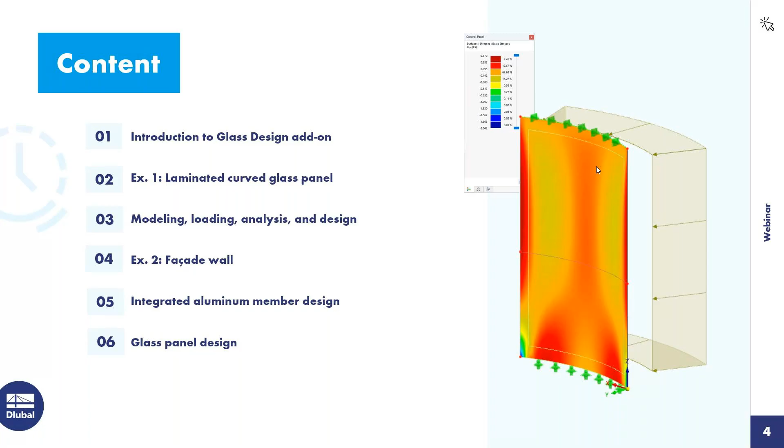So regarding the content over the next hour today, I do want to begin with a brief introduction to the glass design add-on available within our program RFEM 6. We'll then move on to our first example that you can see over here on the right-hand side, which is a simple laminated curved glass panel. We'll talk about the modeling and the loading. We'll run a quick analysis and we'll carry out the design according to the ASTM standard.

For our second example, we'll move on to a facade wall. For this one, we do want to integrate the aluminum member design along with the glass panel design, also according to the ADM standards and ASTM.

So let's turn now to a quick introduction to the glass design add-on. This particular add-on is seamlessly integrated within our FEA program RFEM 6. So RFEM provides the analysis of our structure, including the modeling and the loading, but when we want to carry out the design of these glass surfaces, we do need this particular add-on.

This add-on also allows us to define monolithic or laminated thickness types, just as a fact that we are working on the insulated glass design as well. We'll cover this more towards the end of our presentation today. Now, within the RFEM 6 program, we do have access to our material library for glass materials and foils, but you can also create your own user-defined materials as well.

We have the ability to specify the shear coupling behavior between the laminated glass layers as fully uncoupled or release, or fully coupled or rigid. We do utilize what we call the laminate theory to calculate the panel stiffness. So we consider all of the various layers within a laminated glass panel. We apply the laminate theory to come up with the stiffness matrix for the overall surface. So we'll see this in our example today.

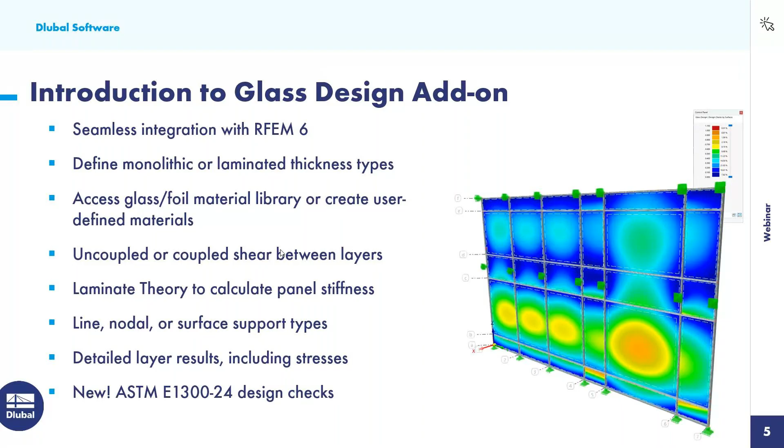So we'll turn now to specifically the ASTM E1300 and how this is integrated within the program. So the first thing to note is that we can generate the load combinations automatically according to the ASCE 7, but it is required that when we enable this glass design add-on that we choose the ASCE 7 glass load combination generator. And the reason why this varies from the standard ASCE 7 is that for our various load cases, we now have enabled the load duration factor. So this is needed to carry out the strength design of our glass panels.

Now, the IBC is also a little bit more clear about serviceability limits for glass or members that are supporting glass panels. So we are going to generate the load combinations for this type according to the IBC and section 1604.3 for our serviceability or deflection checks. And again, this will make more sense as we move through our examples today.

So from the ASTM, we are going to calculate the max allowable tensile stress for each surface. And for this, we refer to table X6.1 and X6.2. Now, this is dependent on the glass type, the load duration that we talked about up here within the load combinations, and the probability of breakage.

Now, I would recommend that you reference the ASTM in this particular section because there are some assumptions here that are made, such as a uniformly loaded glass plate, or there are some limitations with thickness and size in order to calculate these max allowable stresses. So if you don't fit into these particular criteria or recommendations, then you would want to use your engineering judgment if perhaps a general stress design, which is code independent, would be better within the program.

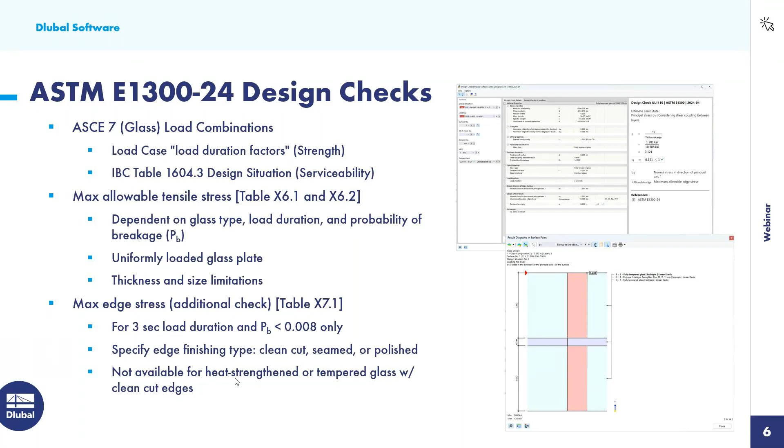Okay, so we will turn now to RFEM for our first example. So when we do launch the main program RFEM 6, we will go ahead and give it a model name within the base data dialog box. The second tab that is shown here are all of the various add-ons that we have available. So more or less, you can create your own software package that's specific for your design needs. For this first example, we will take advantage of the glass design add-on.

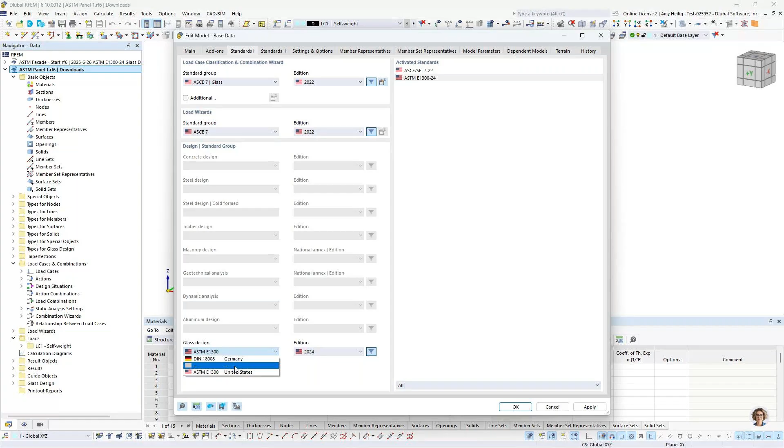So under the third tab, this is where we can set our standards. The first one is the drop down to generate the load combinations automatically. And as mentioned in the PowerPoint, we do need to select the ASCE7 glass option here. The glass design dropdown, we now have the ASTM E1300, the latest 2024 standard. You'll also notice that you can choose a code independent stress design as well if you prefer. So once this information is input, we can click OK.

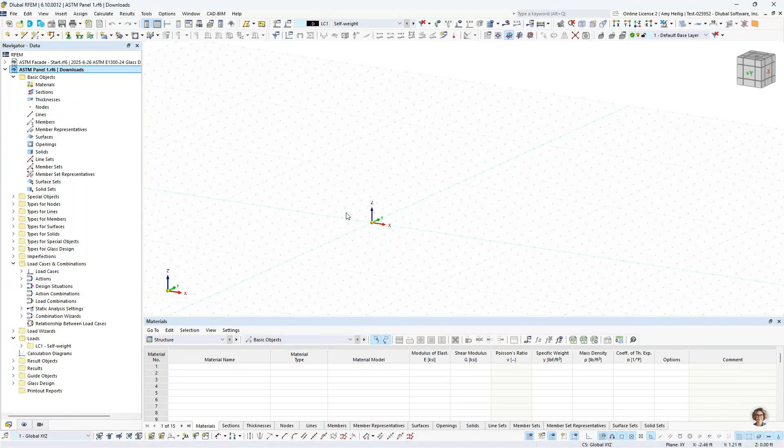When we're brought here into the main program, we have our graphical interface to work with here at the center window. We have our quick tools up at the top. Our navigator on the left will include our input data as well as our results, or we can work with the table options down here at the bottom. So we'll begin first by drawing a simple line element. And a line element can be found up here in our tools.

So rather than a straight single line, I am going to choose an arc where I can define here the start and end nodes as well as the radius. So I'll snap here to the origin point. My second point is going to be 5 feet away in the Y direction. And then I want to either graphically select here what the radius is, or in this case, I'm going to reverse the orientation and directly type in the radius into my dialog box. I hit enter and that line element is complete.

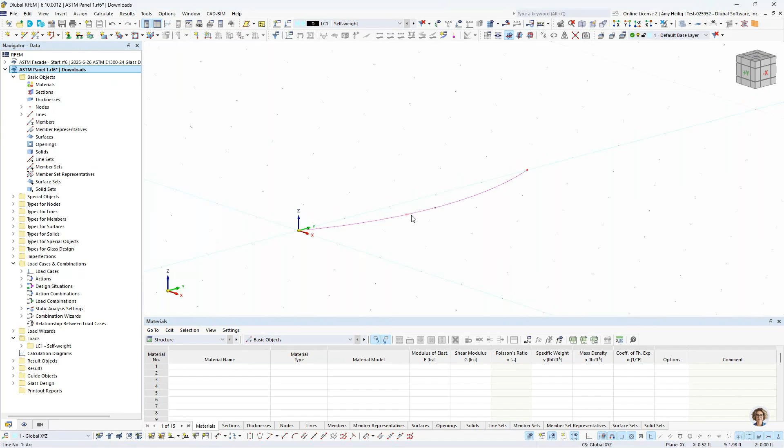So I right click on my mouse and I'm going to select this line element. We have the ability here to right click to extrude this line into a 2D surface. And I'm going to create my surface panel here that will be 8 feet in the vertical Z direction. I hit apply, I'll right click to exit out, and we have our surface shown here. Now it's currently displayed as red because we do not have a thickness or a material assigned to it.

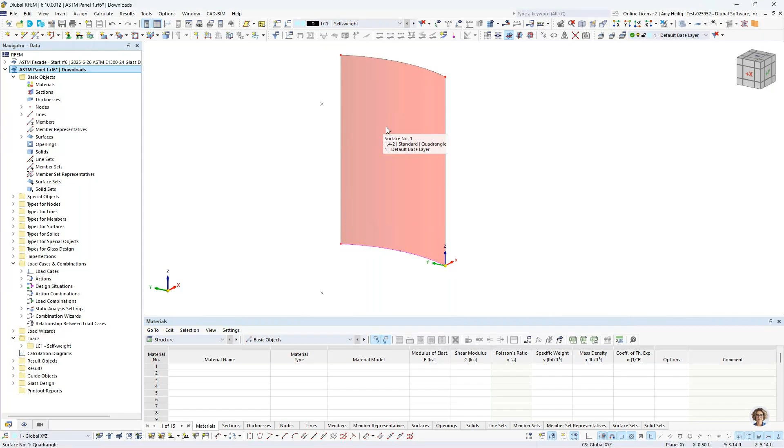So we'll double click on this surface and we can assign here a new thickness type. We create the new thickness type within our dialog box, and under the drop-down is the option for glass composition. So if I did not enable the glass design add-on, I would not have this available option. Under the second tab, this is where we can begin to create these layers for our laminated glass.

And we'll begin under this first row for the material, defining here a new material, which we can select directly from our library. Over on the left, we have our material type dropdown that we can select glass, and we can further select the ASTM standard. So we have 3 different glass types available here, including a fully tempered glass material. I can click OK, and that information is brought into here.

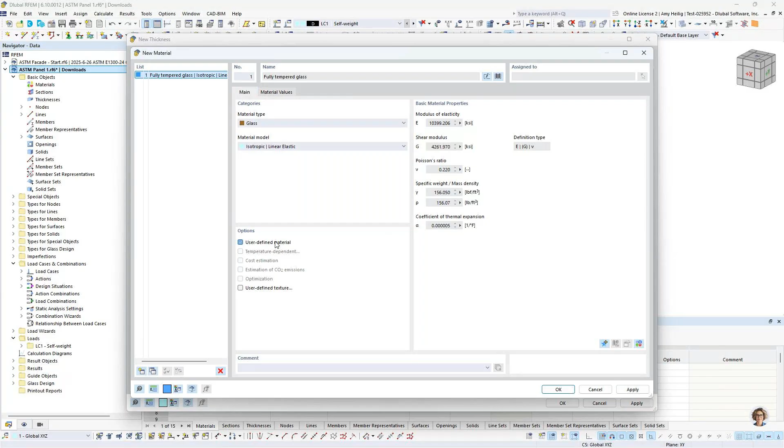Now, if your glass material that you're using is not found in our library, what I would suggest is to choose one of the options as a template. And then we can always come down here to select user defined, and then we have the ability to modify the material properties directly. We can rename this material, but for today's example, I'll go ahead and use the material available to me within the library.

The thickness type is going to be 0.25 inches for this first layer. And then the edge finishing. So you remember from the PowerPoint, we can go ahead and check those edge stresses, but we need to know what type of finish from this dropdown. So we'll go ahead and select polished edges for layer number 1.

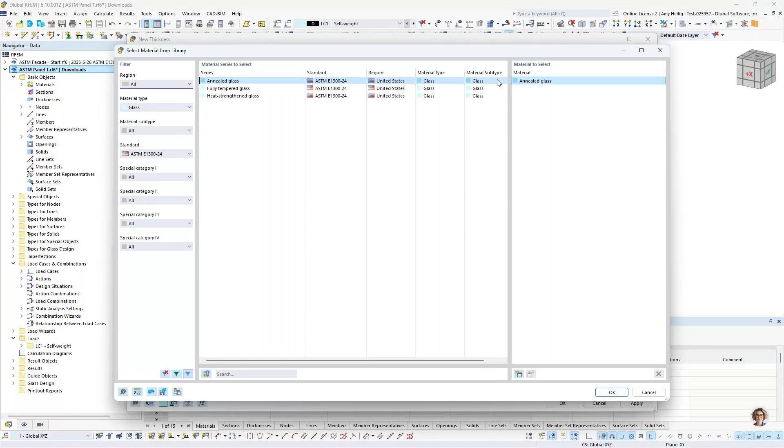For layer number 2, we will create a new material, once again, from our material library. This time, instead of the material type set to glass, we're going to choose foil. We do have some code-independent materials available, such as PVC, or we can use our drop-down here to select

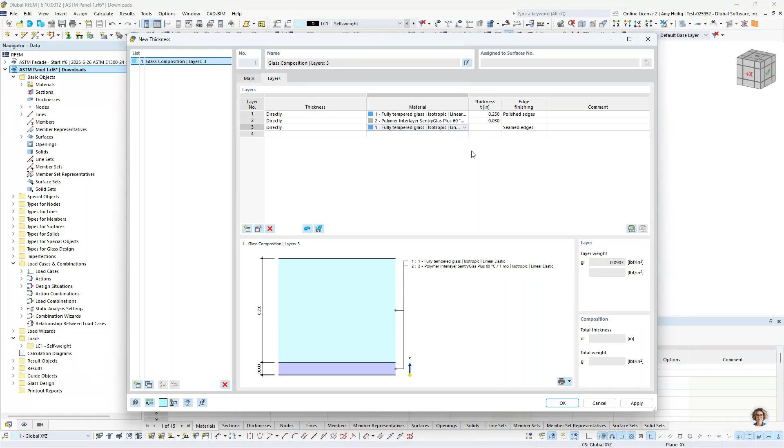the ASTM again, and we have the manufacturer SentryGlas implemented here, so we can select one of these products. I click OK, but if you don't see your foil type, you can turn on the user-defined option here. So we import that as our second layer, and set a thickness of 0.03 inches. Our third layer is the same fully tempered glass, already available within the RFEM model. I don't need to redefine that material type, and the thickness will be 0.25 inches here.

A couple more things to note: this is a very symmetric laminated glass composition. If it was not symmetric, let's say we had a thicker or thinner layer 1 or layer 3, we would want to pay careful attention to the local z-axes shown and ensure they are oriented in the correct direction once we assign this thickness.

The other recommendation is that if we're continually working with these same laminated thicknesses and layers, save this to your library. You can save it as a template and give it a name, so for any future RFEM models, you don't have to keep redefining these layers, but just pull them open from your template.

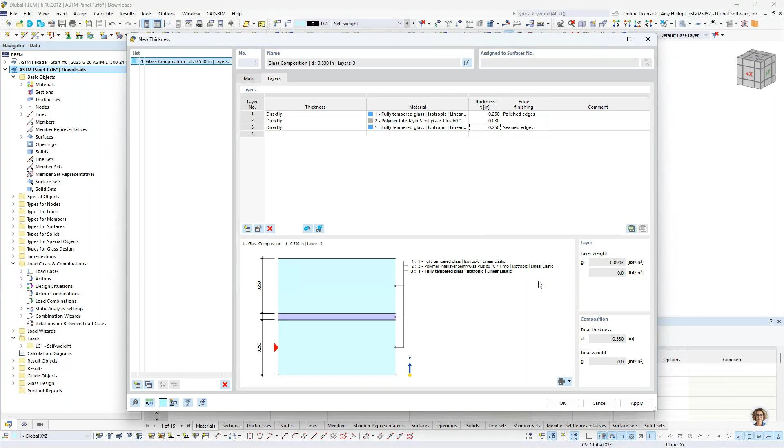Once this information is defined, you'll notice that our surface is no longer red. It's now assigned a color because we have a thickness and a material also assigned to it.

Over on the left in the navigator, we have our various folders available to us, and one of them is the types for glass design. The program has automatically created a composition when I defined this laminated glass.

This is where we specify the shear coupling behavior between the layers. Within this dropdown, we have fully coupled, which is a rigid coupling at the boundary edges, or uncoupled. We'll go ahead and leave this as uncoupled for our example today.

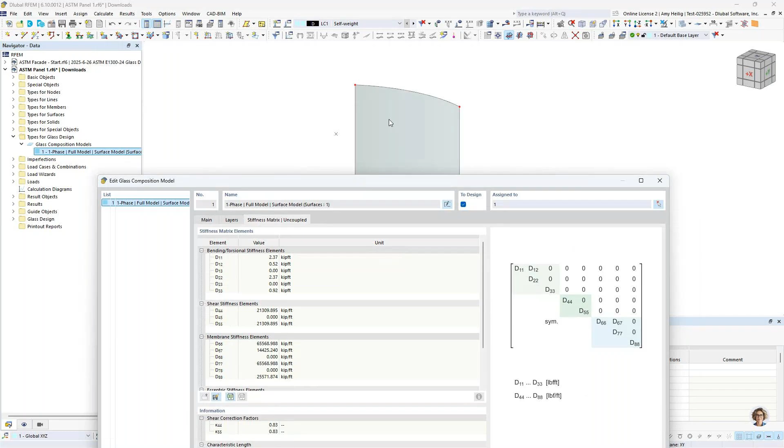The third tab is the stiffness matrix. As I mentioned in the PowerPoint, we apply what we call the laminate theory to calculate the stiffness properties for the entire panel itself, considering all 3 of those layers. We apply the laminate theory, determine the stiffness, and this is what we use in the analysis within the base program. It's very powerful to be able to calculate all of this stiffness automatically.

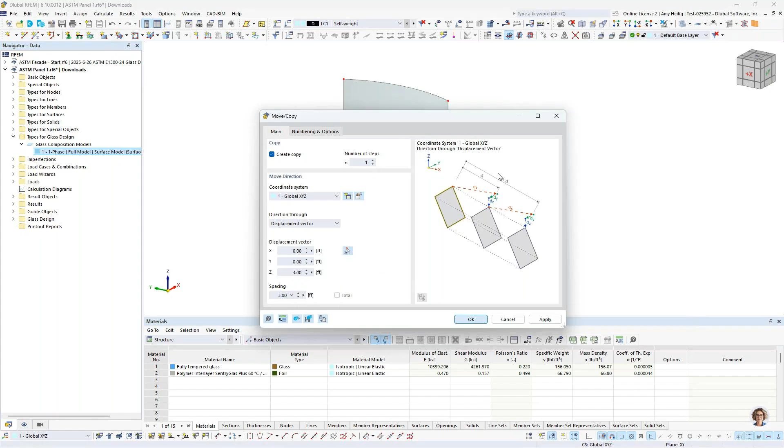Once this information is complete, we will continue with the modeling workflow. Let's assume we have some type of handrail on this glass panel that we want to consider for loading purposes. So I'm going to take this bottom line here, highlight it, use my Move Copy tool to make a copy 3 feet in the vertical direction, and click OK. Now this line element will be fully integrated within this curved surface.

You'll notice a couple other symbols here for what we call surface cells. Those are not needed for today's example, so under our second tab within the navigator, under special objects, we can go ahead and deactivate that graphically.

Now, finally, we need to support this panel. I'm going to apply a new line support, available in my Quick Tools up at the top. For the bottom, I'll take advantage of this predefined support type, which is just a standard hinge support condition. I click OK, and select the bottom of the panel here, the bottom line.

For my top support, I'm going to once again go to a new line support, but this time I want to create my own definition type. You'll notice we have 6 degrees of freedom, 3 in translation, 3 in rotation, where we can fully fix or fully release this line support type. We have spring constants for partial fixity, or because RFEM is a nonlinear analysis program, we can assign a nonlinear behavior type to this support condition.

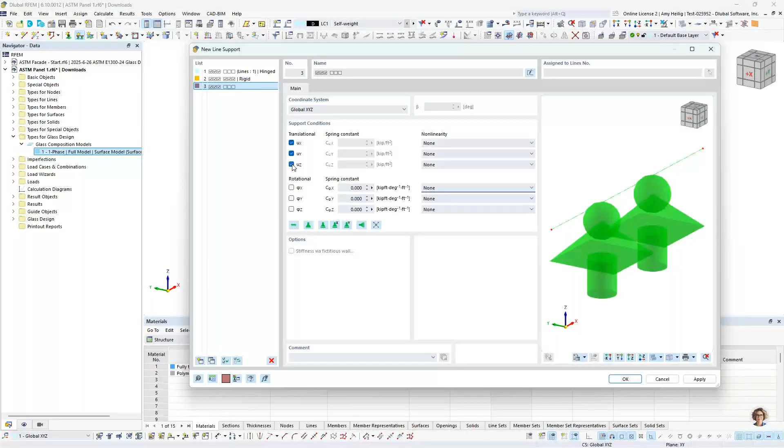Now for the top of my panel, I simply want to release the translation in the vertical direction, allowing that panel to move. But in the translation directions of X and Y, we'll set a restraint there. We click OK, and then we can simply click at the top of this line element.

Keep in mind you can always right click on these symbols and use our sliders to decrease or increase the size, just depending on your model type. So we'll now move on to loading.

I'm going to access our load cases and combinations dialog box here. You'll remember that when we first started this example, we are going to generate the load combinations automatically according to the ASTM E1300-24 glass option. This will automatically be done when this combination wizard is checked on. So if I prefer to manually create my load combinations, I would just want to uncheck this instead.

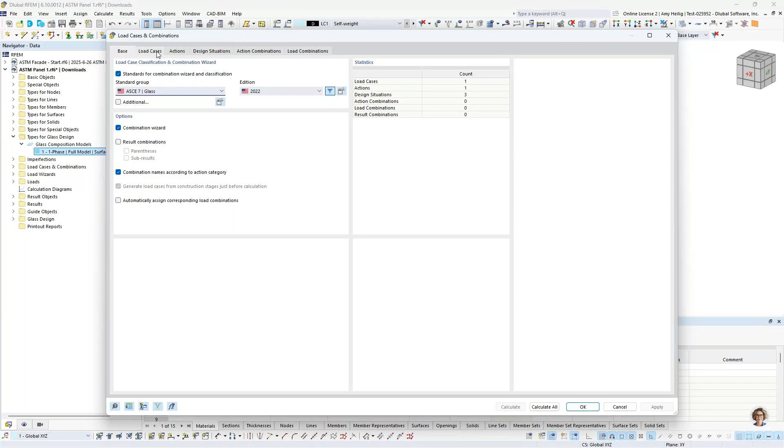Now, under the load cases, the program by default creates a self-weight load case. We'll go ahead and rename this one to dead with the action category set to dead load here. Notice self-weight is automatically accounted for, but the load duration is something that is unique to this ASCE7 glass option. We made some assumptions here based on the various actions of what the load duration should be, but if you'd like to make changes, you can use this drop down for each load case.

We'll create a second load case here. This one is going to be live load with the action category of live. Notice the load duration is automatically updated. We have a third load case here for wind pressure. The action category will be set to wind. This is important to note, this load duration is set to 3 seconds, so this will come into play with those edge stresses that we check later on. I'll make a copy of this one and simply rename it to suction.

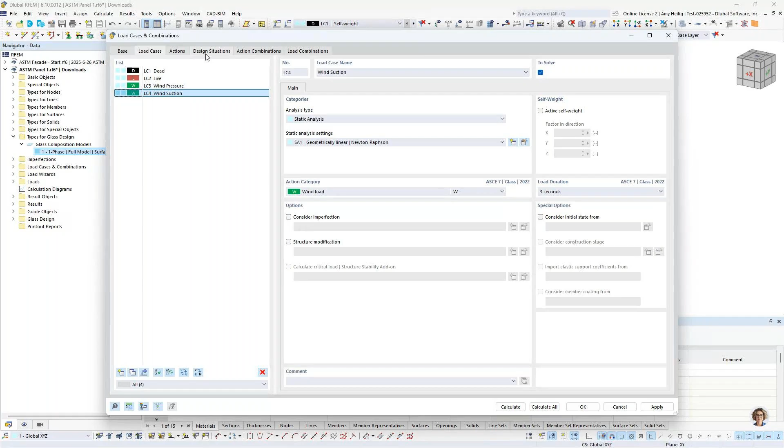Now that the 4 load cases are defined here, you'll notice under the design situations, the program creates 3 design situations. The first 2 are referring to the ASCE7. The first is LRFD, or our factored load combination. Think of design situations as nothing more than grouping together these load combinations, which we use later on within these add-ons. Now for LRFD, my factored load combinations, I'm actually not using those for today, so I can just completely turn it off here, or if I prefer, I could delete it altogether.

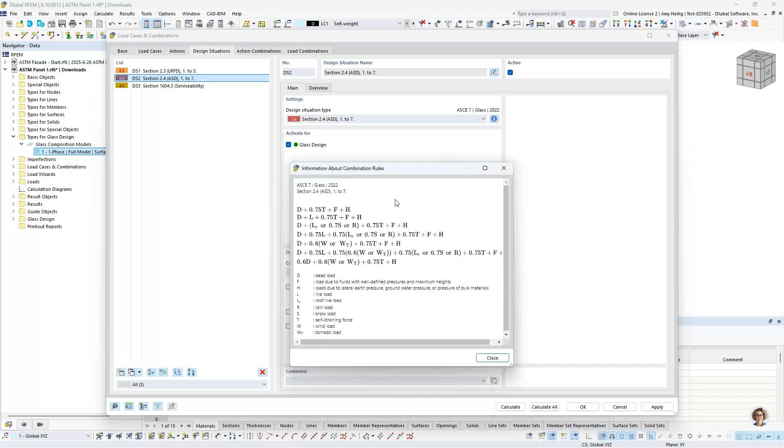The second design situation is ASD, or unfactored load combinations. We can click on the little info button here to see these directly from the ASCE7. This will be used in the glass design for our strength design.

Now, finally, I mentioned in the PowerPoint a bit unique to the ASCE7 glass option is that the IBC is more clear about what the limiting deflection should be for something like a glass panel or the members supporting glass panels. So we've created this third design situation, not related to the ASCE7, but rather the IBC section 1604.3, to generate these load combinations from the IBC that will be used in the glass design add-on for serviceability.

Finally, under the load combinations, we can check out the individual load combinations listed. We see all of our ASD load combinations in red belonging to that second design situation, and then we see all of our IBC load combinations here belonging to that third design situation. Now you'll notice that the program by default for load combinations will carry out a second order analysis considering P-delta effects, but large deformation or third order is also available within the program.

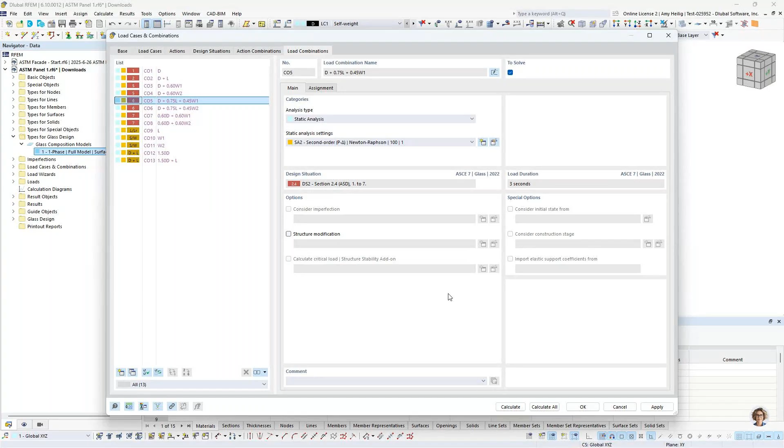So now that we have generated the load cases and the load combinations, we need to actually apply the loads to this structure. We will select here the dead load from our dropdown, and I'm going to apply a new line load. This is not to be confused with its neighbor here, a new member load.

We don't have any members within this model, but a line load is applied to anything similar to a surface, for example. So the load direction is going to be in the vertical Z. The load magnitude here is going to be negative 0.1 kip per feet. Then I'm going to graphically select this top line here to apply this line load, and I click OK. So now we see that line load applied at the top under the dead load case.

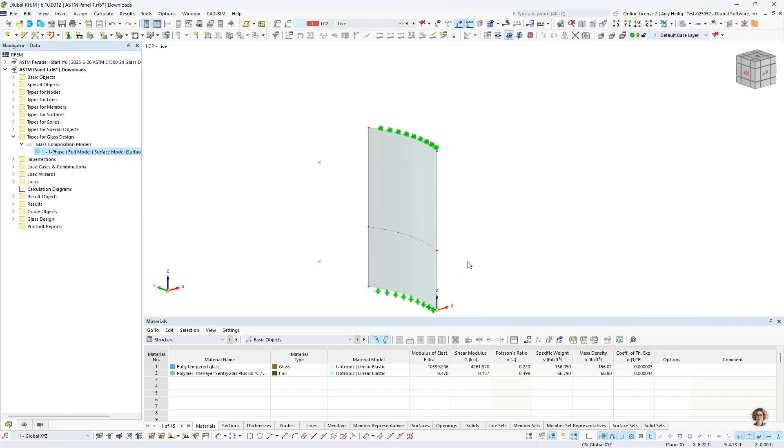The next load case is live load, so this is going to be for our handrail. For this particular loading, I'm going to right click on the line to turn on the local axis system of the line element itself.

This way I can go back to a new line load, but rather than applying the line based on the global XYZ coordinates, we're going to modify this to apply it to the local lowercase xyz of the line element itself, in particular the local Y direction. So we select that here from our dropdown, and our magnitude is going to be negative 0.07 kip per feet.

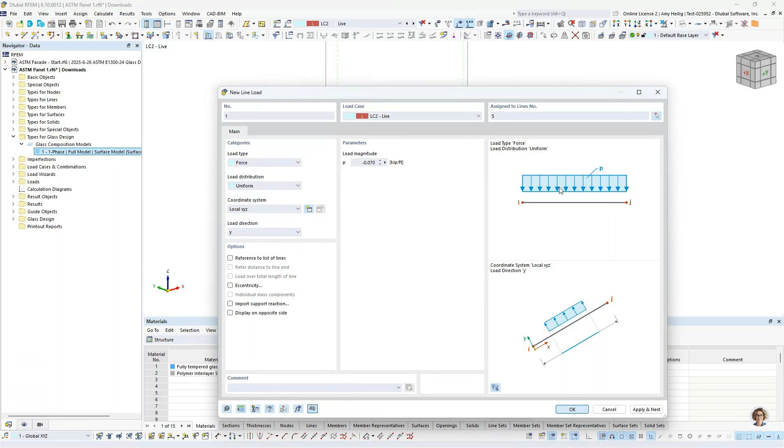Line number 5 is already selected here. I click OK, and now we can see that live load applied to the handrail location. So we'll go ahead and turn off the local axis system of our line, and we'll move finally on to our wind loading.

So for this one, I'm going to right click to turn on the local axis system of the surface this time, so we can see that displayed here. And I'm going to apply a new surface load.

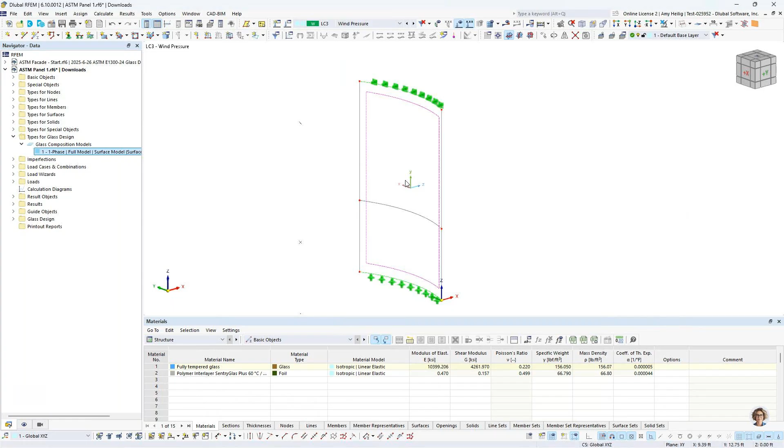So we select the surface load dialog box, and again, very similar to the line element, I'm going to modify this to the local XYZ coordinates of the surface itself rather than the global XYZ. The load direction will be in the local lowercase z here, which is already selected. And our magnitude is going to be negative 0.03 kips per square foot.

You can see surface number 1 is already assigned. I can click apply and next. So I still remain within this dialog box to continue making changes, but we can see that this load was applied in the background here as a wind pressure normal to the face of the surface.

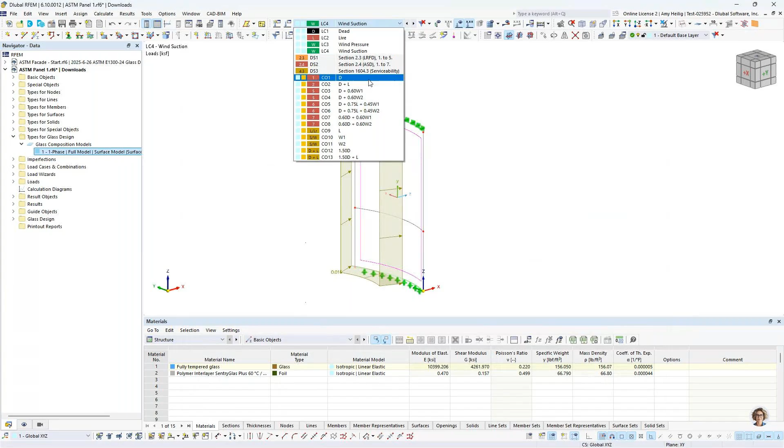So this way I can toggle down to wind suction and just make a quick modification here to my magnitude of 0.015 assigned to surface number 1, and I click OK, and now we have this additional suction load shown here. So I have the ability to display these loads together based on the load combination, where the relevant load factor will also be displayed here graphically.

So before we move forward with the calculation, a couple more things to take a look at. The first is going to be our mesh settings. So let me right click here to turn off the local axis system.

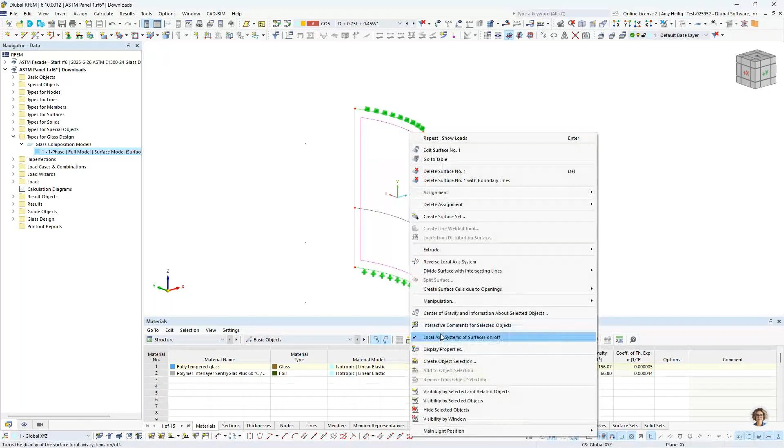And under our tool up here at the top, we have the ability to quickly generate the mesh. And by default, the mesh size is going to be 1.5 feet for any new model. And we can see that this is entirely too big for this panel.

So within the same dropdown, we can access the mesh settings, and to modify this to a smaller value of 0.25 feet, I click OK and apply. And what you'll notice now is that we have a much smaller mesh generated, which looks much better for the FEA calculation.

Okay, the final thing to talk about, and I'll go ahead and turn off the display of my mesh, it still exists, we're just turning it off graphically, is to double click on this surface. So you'll notice we have the design properties shown within this dialog box.

This is telling the program that not only are we interested in the analysis within the base program, but we're further going to design it within the glass design add-on. Now, when I turn this off, notice a couple tabs up here disappear. That's just simply telling the program I'm more interested in analysis than design.

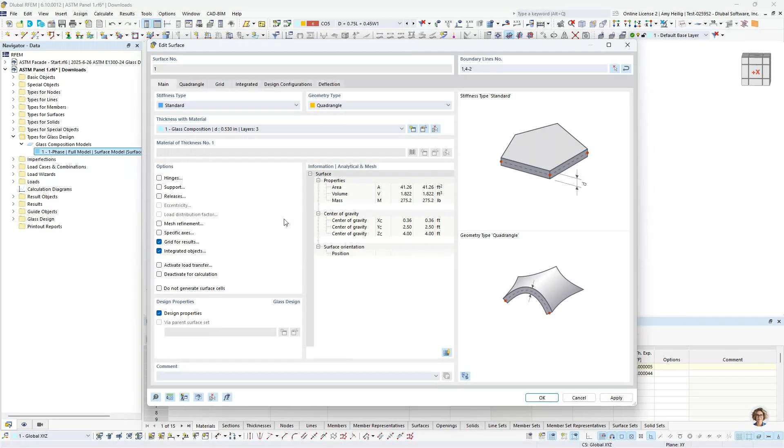But of course, we want to carry out the design. So let's take a look at these additional tabs. The design configurations has everything to do with strength and serviceability specific to the ASTM. So looking at the default option definition here for strength design, you'll notice the first input has to do with the design stresses that we want to design for once we are within this add-on.

And for this, I'm going to jump back to the PowerPoint to explain this in a bit more detail. I think that when we do carry out an analysis, it can be a bit confusing because there's so many stresses that are available to us within something like an FEA program. But when we are specifically looking at glass design, we typically look at tension stresses.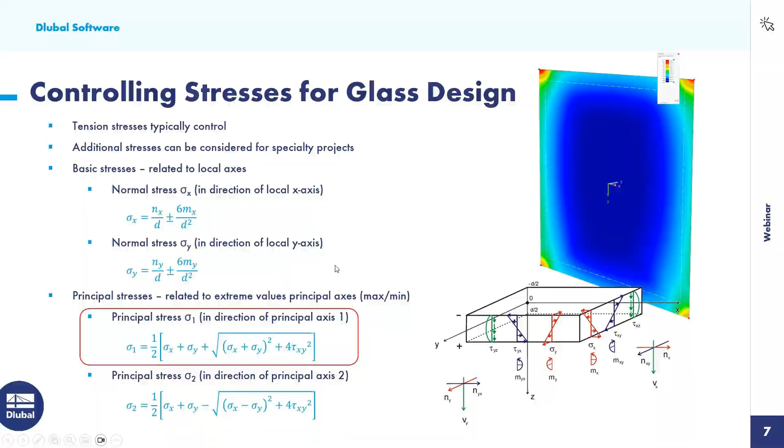But by default, which we'll see in just a minute, the main stress that we will always design for is this principal stress sigma 1. But it's up to you as a user if you also want to select these additional tension stresses to design within the add-on as well. So going back to RFEM, as I mentioned, you'll notice this principal stress sigma 1 is automatically selected by default. The probability of breakage. So this is just a drop-down box here that we can select for this particular surface.

And then we have the checkbox to consider the max allowable edge stress. Again, this was from the PowerPoint where we refer to section X7 from the ASTM. And it should be noted that this is only available for load combinations that include that 3-second load duration. So for our example today, that was our wind load. So any load combination that has wind in it, we will check the edge stress. For the other load combinations, we will not carry out this design check.

You as a user also need to specify here the distance from the surface border for these edge checks. Now the default here is a 2-inch border. So everywhere around the border lines of this surface in a 2-inch dimension, we will go ahead and carry out these edge stress checks if they fall within this category here.

So once this information is defined, let us also take a look at the serviceability. This is just where we select here or input in here the limiting deflection ratio. So for simply supported glass panels, this is set as L over 175. For cantilevers, it's L over 50. These values come from the IBC, but you have the ability to override them here.

And finally, the deflection tab. So this is where we can tell the program, is this panel supported at both ends or is it a cantilever? And this information is important because we need to know which limiting deflection ratio to refer back to. The displacement reference can be set either to absolute or to relative, and the default here is the undeformed system, or the absolute is what we'll refer to for this example.

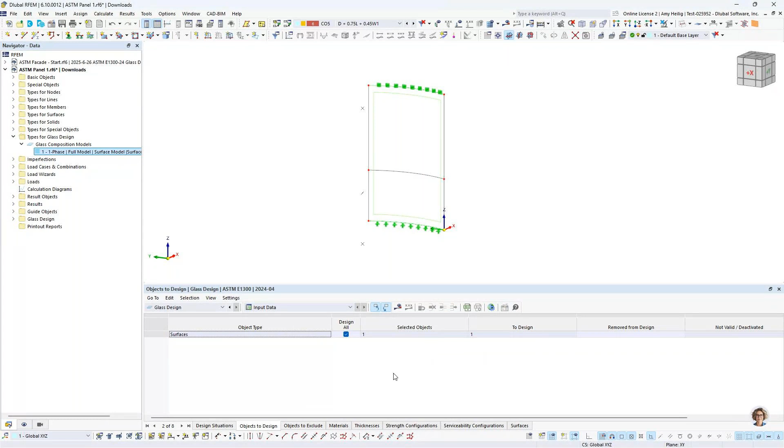So now we can run the calculation. So we either click on the calculation in the table, or we can go up here to calculate all. The program will cycle through all of our load combinations rather quickly and then apply the ASTM design checks, and we are now presented with our design ratio.

So the first thing to note is that we can graphically turn on the display of the design ratio here, either the ratio envelope, so the max of both strength and serviceability, or we could turn on strength and serviceability individually here, again shown graphically.

In table format, what we see here, if we jump to the design ratios by surface tab, is we have 4 different checks. Now, a couple of these are negligible, meaning we don't really have any tension stresses, or maybe we don't have any deformations under this particular loading in this particular location. So we can use our filter to only look at our design checks greater than 0, and we're left with 2 simple design checks. The first is going to be the strength, where we are taking a look at that principal stress sigma 1.

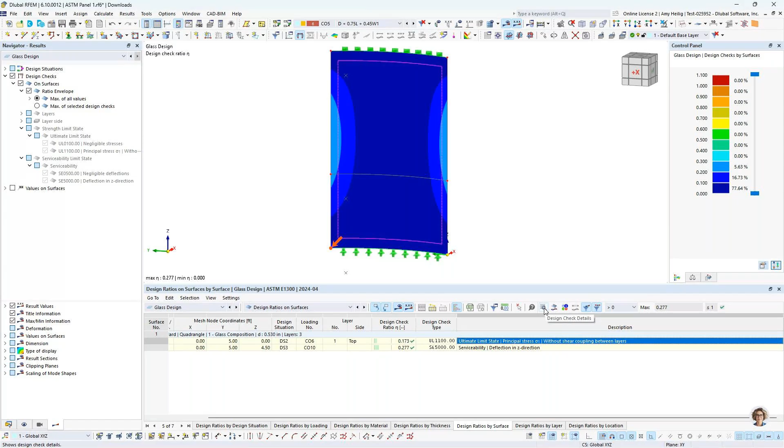We see the design ratio shown here in table format. What else you have the ability to do is to expand here the design check details. Now, with the design check details, we can zoom in where we see the max stress from the analysis. You'll see also the allowable, and in this case, the edge stress, and ultimately how we are calculating this design ratio. Now, the edge stress is controlling for this entire panel at this particular location shown here with the red arrow.

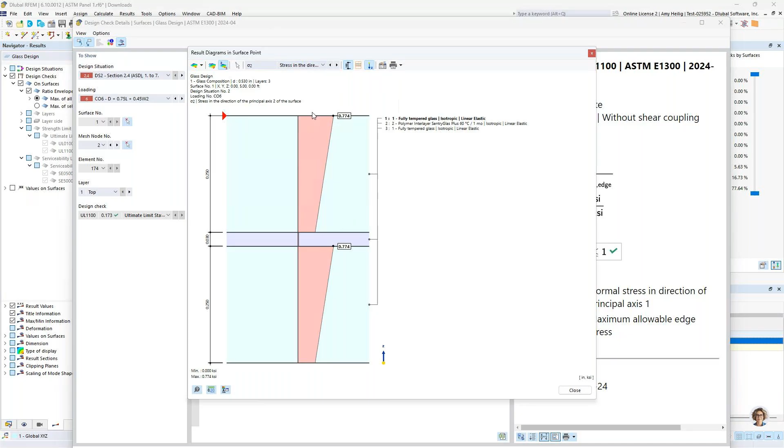Additionally, we can display here the diagram of this glass panel. So this is a cross-section view looking at both of those glass layers and our foil layer, where in our dropdown we can select the stress display, and we can view those normal stresses X and Y, or we can drop down to sigma 1, those principal stresses in the direction 1, as well as sigma 2 in the principal axes 2. We can also display here the shear stresses.

We can add this as a picture to our printout report. We can add these formulas to our printout report as well. So everything is very transparent in ultimately how we're determining this strength design ratio.

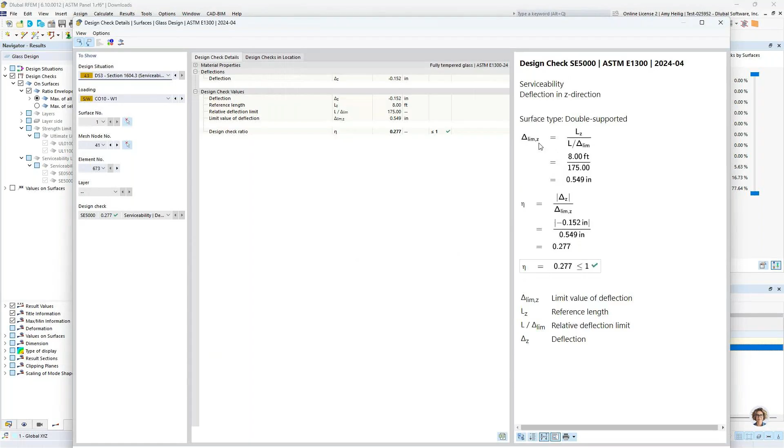Now for our serviceability check, you'll notice that the red arrow moved up here. This is where our max deflection occurs. Again, we can view the design check details here. And you'll notice that we have the deflection from our analysis. We have our limiting deflection ratio that we've set for this panel, and the ultimate design ratio shown here at the bottom. Now, this is just the 2 controlling checks for the entire panel.

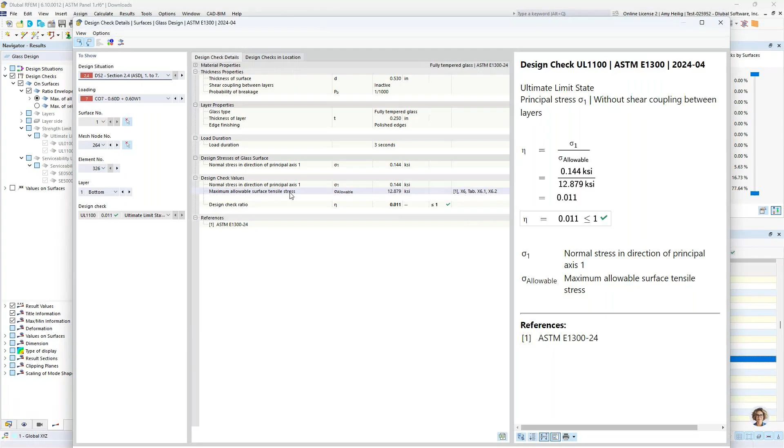If we want to jump to the design ratios by location, we will actually give you the design checks at every single mesh point within this panel. So if we jump here to an internal point instead, we are carrying out the tension stress for the principal stress sigma 1, but what should be different here is that we're no longer checking edge stresses. Rather, we're going to refer here to table X 6.1 or 6.2 for just the max allowable tensile stress instead, because we're not within that boundary here for the additional edge stress checks.

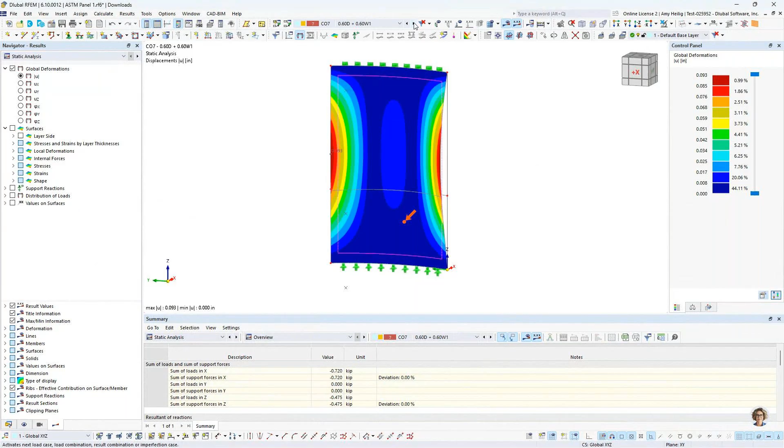Now, this was all the information specific to the ASTM glass design. We could back up a step to the static analysis within our navigator here. And what you'll notice is that over on the left-hand side, we can turn on information like the global deformation, and we could cycle through these different load combinations here just to see how our panel changes depending on the loading. We can also activate the support reactions graphically here.

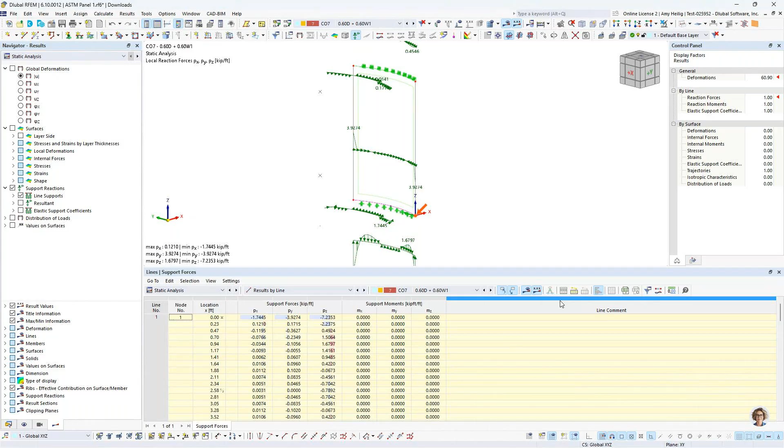So the support reactions can be shown either within the graphical window or in table format. We see the results by line, and we're going to be able to see those support forces here where we can export out to Microsoft Excel at the click of a button or any other information that we're interested in table format. Now, we also might be interested in the stresses.

So what's really cool with the glass composition is that you'll notice we have the ability here to select the particular layer, layer number 1, for example, and I can activate my principal stress, sigma 1, but I can view this on the top layer side. So we're currently looking at layer number 1, the top side. I can toggle this to layer number 2, the bottom side, and see the relevant principal stresses here. Or I could jump to that third glass layer and view the stresses at the top or at the bottom as well.

So not only do we have the ability to view information for the panel as a whole, but we can really drill into each one of these layers to view the various stresses at the top, middle, or bottom side of the layer itself. Okay, so that will conclude our first example today. We want to now move on to our second example.

So this might be a little bit more interesting because we want to integrate a full facade wall design. So I want to first begin in our standalone program, RSECTION. Now, it's pretty common with something like a facade wall when we're integrating this with glass panels that we might have custom aluminum extrusions. So the powerful thing about RFEM is that we can carry out the design of these supporting members along with the glass. So that's what I want to show you today.

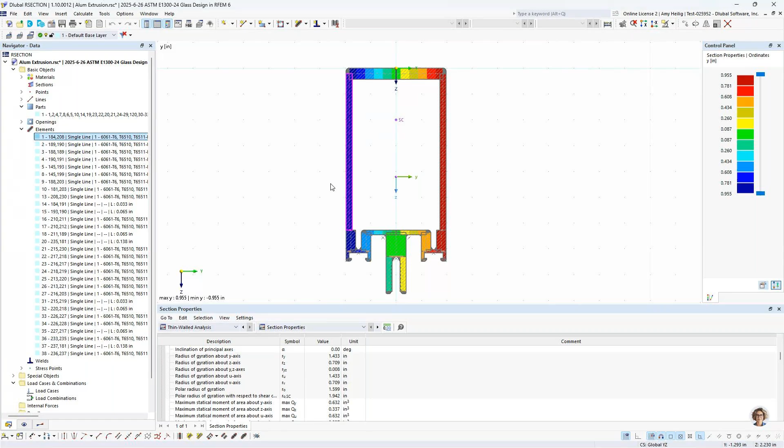But the really unique and powerful thing is that we can also check local buckling according to Chapter B. I think that we're one of the only programs, or maybe there's another one out there, but as far as I know, I think we're one of the only programs that's able to also check the local buckling. So something important to remember here for these custom aluminum extrusions.

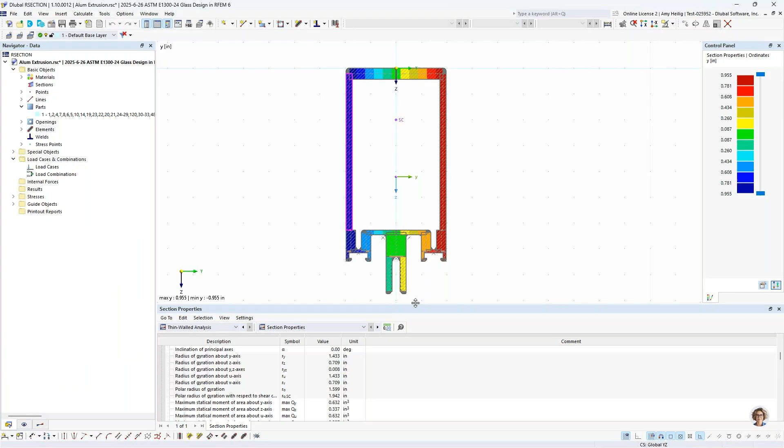But once we run the calculation, you'll notice that we are presented here with the section information like area, moment of inertia, shear area, and we would want to save these results in this file to a folder on our computer. So then we are going to go into RFEM. And for the sake of time, I have already modeled these aluminum members, and we'll get into that in just a minute to do just a quick overview.

But before I do, let's visit the base data dialog box. So again, this would be the dialog box that pops up when you first create a model. And once again, we're going to take advantage of the glass design add-on. But I can also activate here the aluminum design add-on. So we can do the full analysis of these aluminum structures, but if we want to carry out the design checks according to the ADM, we do need to activate here this specific add-on.

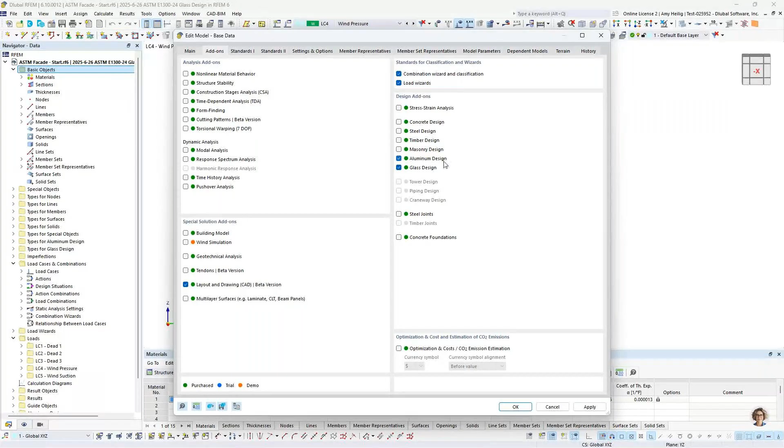And under the standards, you can see the ADM 2020 is available, and then we'll go ahead and of course take advantage of the ASTM E1300. So now that this information is defined within the base data, we would want to draw all of our members. So when I would go to draw one of these custom aluminum extrusions as a member, I would probably go up here to draw a new single member. The member type would be set to a beam, and then I would define the cross section.

Well, within our cross-section library for the supporting members with our glass panels, if they come directly from the ADM or the AISI or the AISC or whatever it may be, all of those standardized sections are available in the upper left-hand corner. Now we have some other parametric sections available. So for these, you would just input the dimensions, and the program calculates the section properties for you. But for anything more complex like that aluminum extrusion, we would want to import from RSECTION.

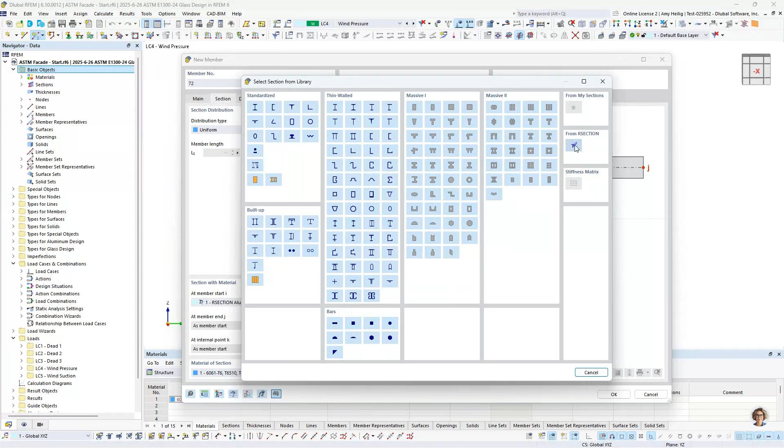So within RSECTION, you can see here that I could right-click in the projects folder to connect a folder that exists on my computer where I have saved this aluminum extrusion. And that's what I've done here. I've calculated the results. I've saved it to this particular folder. So we can bring that into RFEM.

And what we would normally be presented with is the dialog box shown here where we get a nice rendered view. The material was already brought in from RSECTION where I defined it, but I could always change it here to a different aluminum material from the library where we have all ADM materials available to us.

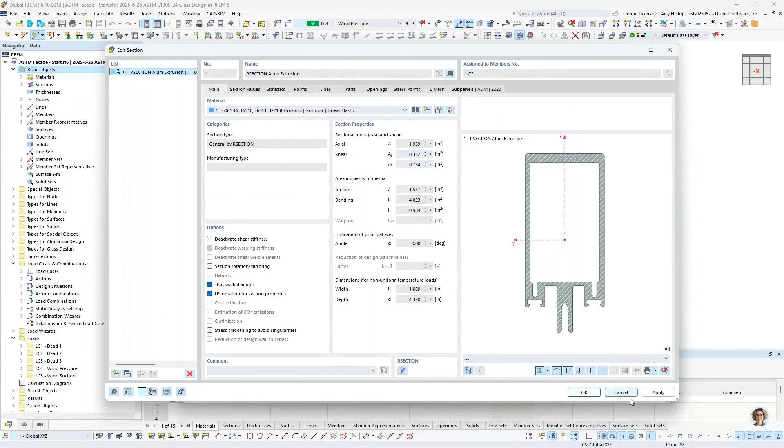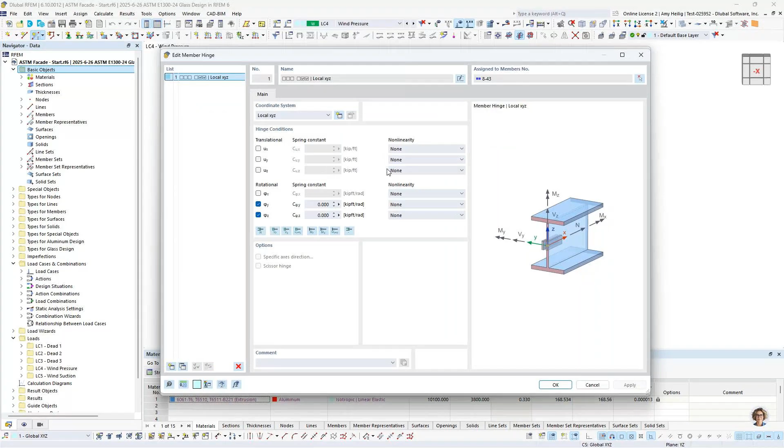So once we have imported this section, it's also noted that when we draw members, the program assumes that each member that connects to the adjacent member is fully fixed. So if we want to add something like a moment release, we would just need to activate here the member hinges. And this is where we could define a new member hinge type, which you can see I've already done in the program, where maybe we want to release the moment about the local Y and local Z axes. So we could apply this moment release if it is applicable to our members at both the member start and the member end.

So I would go ahead and utilize my drawing grid here and draw all of my members. And again, I've already done so for the sake of time. What else is nice, and I'll go ahead and turn on the display of only one of these members, is that when you import from RSECTION, we do give you a nice rendered view of these extrusions. So there's no confusion here on the orientation of the member.

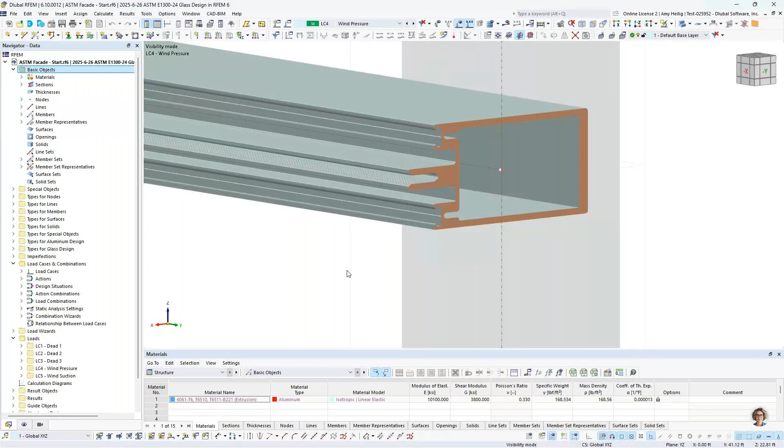There are other competitor programs out there that just kind of bring in a basic shape. Again, it's difficult to tell the orientation, but with our section integration, you can see here that the AutoCAD DXF file was automatically brought in here for the accurate rendering.

Okay, so we'll cancel out of this visibility mode. The other thing to know are just the nodal supports that are applied to our structure. So in our navigator over on the left under types for nodes, you'll see all the nodal support definition types as I click through them, just assigned to various nodes here within our facade wall.

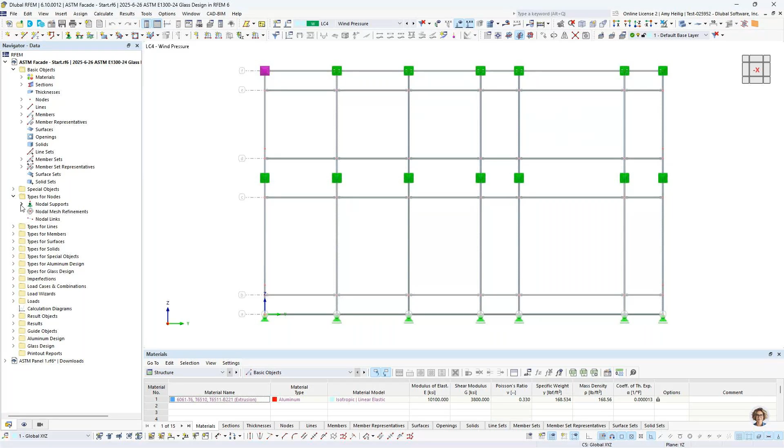So now that the members are modeled, we need to also model our glass panel. And for this one, I'm just going to draw a general rectangular surface. And with the surface, so this is not going to be curved, it's just going to be in a single plane. We want to define here a new thickness type, just like with example number 1. We're going to select here the glass composition.

And under the layers, so I mentioned taking advantage here of our library options. So defining these compositions, saving them to your library, because now for this example, I'm just going to choose a glass composition that I saved as a template. And you'll notice that all of the materials are brought in, the thicknesses, the edge finishing, all automatic. So I don't have to redefine those layers each time.

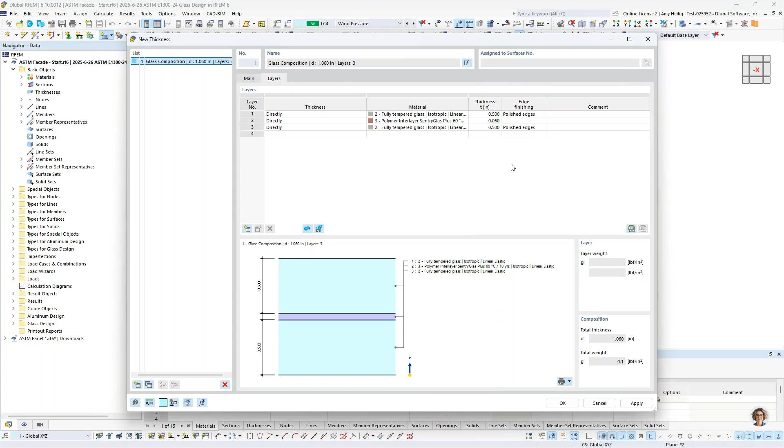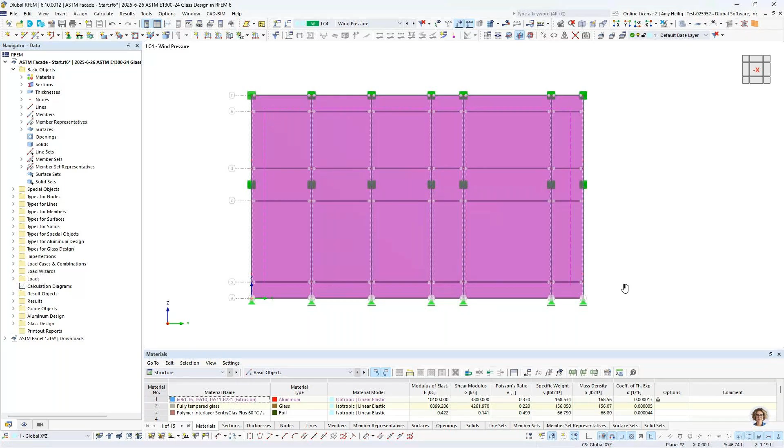Okay, so now that the thickness has been assigned here along with the material, what we will do is to snap from the upper left-hand corner to the lower right-hand corner to generate this surface. Now, in the current state, this is one continuous surface, and we certainly don't want that, right? We would rather infill each one of these bays that span in between the aluminum extrusions with a glass panel.

So we have a nice modeling feature here where I can right-click on this surface and I can go ahead and divide it by the intersecting lines. And so now what you'll notice is that I have individual glass surfaces here spanning between these aluminum extrusions.

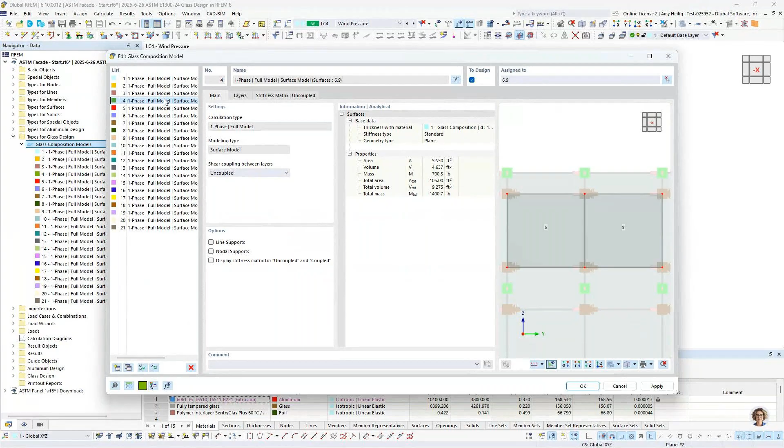Now, going back to my folder here, again, similar to example number 1, let us take a look at the glass compositions. So what the program does is it actually creates a separate composition for surfaces that share identical geometry. And this will come into play a little bit later on as we develop the insulated glass panel design. But for now, that's just why separate compositions are created here. So some of the compositions might have 2 surfaces, some might have 1, or some might even have 3.

For all of these, I can just hold down my Shift key to select all of them. And for all the panels today, I want to change this to a rigid coupling. So I go ahead and make that composition change. I click OK, and now that's applied to all of my glass panels here.

Now I'm going to select all of my surfaces, and we can double click on them. Again, exactly identical to example number 1. We have the strength and serviceability configurations. I'm not going to make any changes here. We're going to leave all of those as default to what we have already covered before.

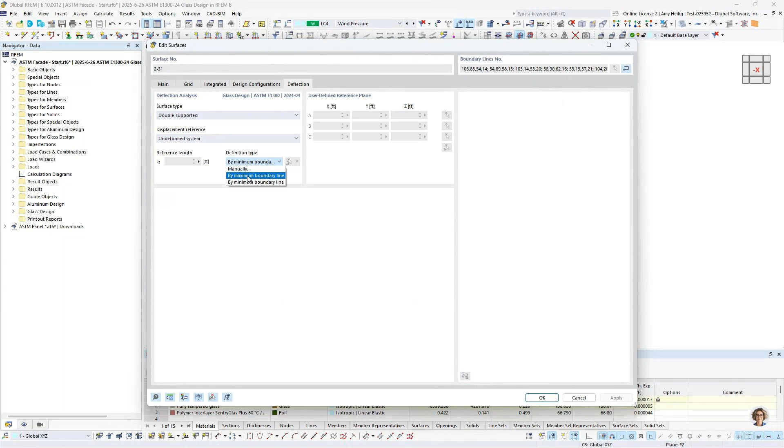The only modification that I want to make here is I would like my reference length here to be the maximum boundary line for my glass panel for my deflection checks. And that's all that's required here for our glass input.

Now, one thing to mention, these glass panels are rigidly connected to these aluminum members. If you have a scenario where maybe we want to account for some type of slip, or maybe we want to release the moment, depending how these glass panels are attaching to these aluminum members, we can always go under the option here, types for lines, and apply what we call a new line hinge.

So if I double click on this, you'll notice that we have 3 degrees of translation, and then we also have our rotation. So we have the ability to completely release the moment, for example, of the glass panel to the aluminum member, or if we wanted to account for some type of slip again along the length of this connection, depending on our project type, we could input in here a spring constant. So that is always available again with these line hinges.

Now for today, I'm just going to consider everything as a fully rigid connection between both the surfaces and the members. The final thing to talk about before we get into loading is just the aluminum members themselves. So I created here a couple visibilities where I want to look at first all of my members spanning in the global Y direction.

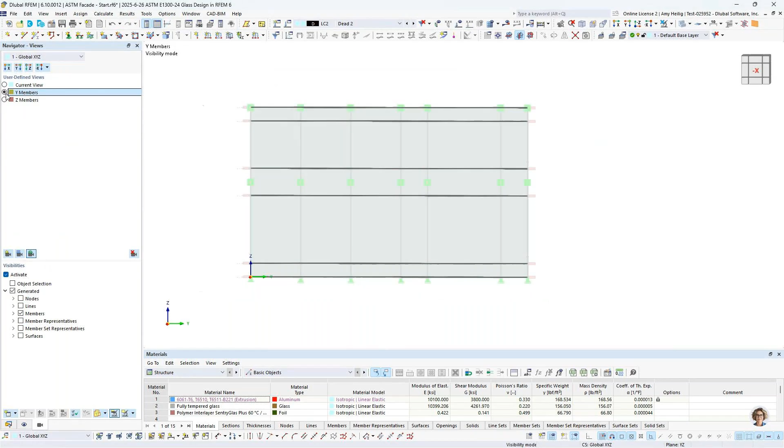So again, these are the members kind of spanning in between the vertical members here. Now for all of them, if we double click, we have the exact same concept for aluminum design as we do the glass design. And that's the benefit here of RFEM, is that these add-ons all have a very similar workflow and feel. So I am interested in carrying out the design according to the ADM.

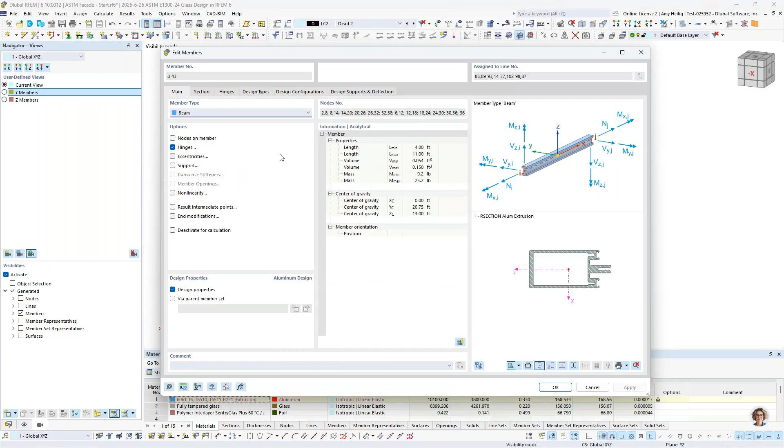So I have my design property selected. Therefore, I have a couple additional tabs up here at the top that are specific to the ADM design. They do not affect the analysis. And the first one to talk about is effective lengths, or what are the unbraced lengths of these members. And I'll also preface that I did give a previous webinar devoted entirely to ADM member design, which I would refer you to, as we don't have much time to get into it today.

But basically, we can turn on here the stability failure modes. And those include flexural buckling in the strong and weak axis direction. Now, this is a more box type section, so perhaps I'm not concerned with torsional buckling or lateral torsional buckling, so I can completely turn those off.

But what the program does is we can place these intermediate supports at the member end. So these don't affect the analysis whatsoever. They're just used to automatically define the unbraced lengths. And in this case, it's set to the member start and member end. So the unbraced length is the full member length. But of course, we can make modifications here.

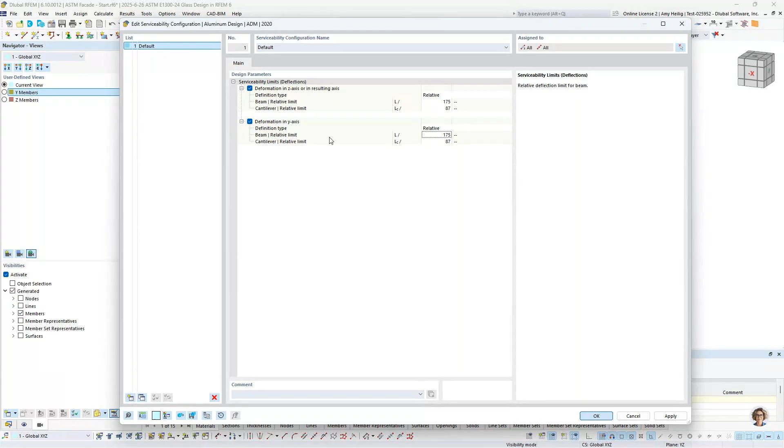So once we have input in the unbraced length, we also have strength and serviceability configurations for our aluminum design. And the strength I'll go ahead and leave as default, but for our serviceability, because these members are supporting these glass panels, we need to have smaller limiting deflection ratios set here. So if we refer to something like the IBC, maybe we reduce the limiting deflection ratio for simply supported members to L/175 as well.

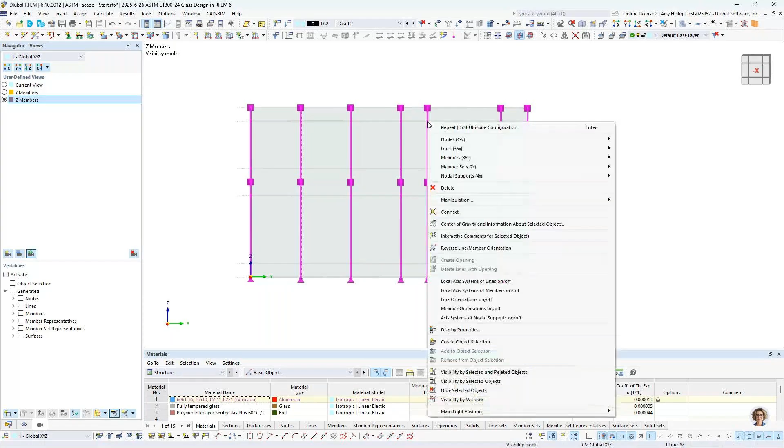So once this information is input for our transverse members, we also have our vertical members. And in this case, these were modeled as separate segments. So it's entirely possible, though, to design these as one continuous member. And how we do this is we can right-click here under the member to create what we call member sets. Now, it's also possible to keep this as one continuous member. You don't have to break it apart. So both options are possible.

But once we define those member sets, it's just grouping together these individual segments here for the member design, so we can design it from top to bottom as one continuous member. But with member sets, it's the same workflow that we just saw with our members, where we would want to input an effective length. And you can see for this one, a little bit more complicated because we have these various supports in the strong and weak axis direction framing into this member. But again, these are all used for the effective length in the strong and weak axis flexural buckling checks.

Design configurations, we have already set these, so they're going to share the same configuration settings. And then the design support. So same thing for deflection. These members are supported sometimes in the weak axis, sometimes in the strong axis, just depending on the different members and support types in the global model. So we can also define here what we call design supports to be taken into consideration for those serviceability checks.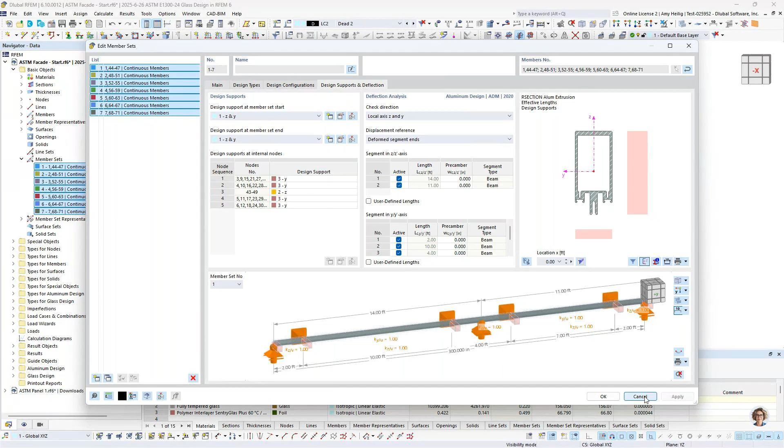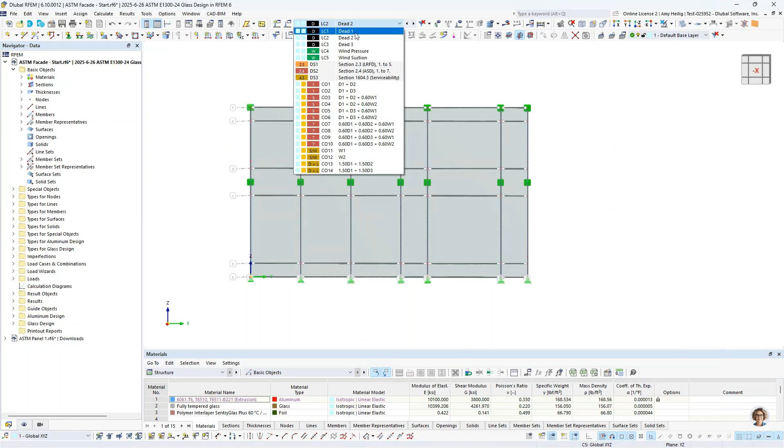Okay, so once we have input this information specific to the ADM and our aluminum members, let's take a look here at the loading. And again, really identical workflow to example number 1. So we don't need to get into the same load combination generation, but I've created 5 different load cases here. The first 3 are going to be a dead load.

And if I display the loads that have already been applied to this structure, you'll notice that if this is some type of facade, maybe we have some additional elements framing into it, and we have this downward load applied to each one of these transverse members. So this is just a simple member load where I applied it as 2 concentrated loads at 10% and then at 90% of the member length.

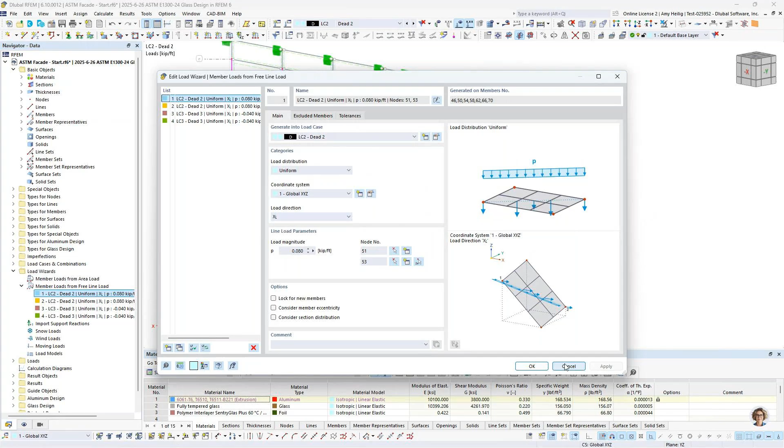The second dead load case is a really cool feature that we offer in RFEM. So under the load wizards, we have the option here to generate member loads from a free line load. And within this dialog box, we can specify here the load magnitude, the direction, which is in the global x-axis, and then the start node and end node. So that's what I went ahead and did here. I just defined this basic line load across the face of my facade wall.

I can right click here to display separately. The program considers the tributary area of this line load and applies it automatically as point loads to each relevant member in the vertical direction. I used this for both load case number 2 and load case number 3, just reversing the orientation and adjusting the magnitude. We could always right click to display separately again if we'd like to see it as a continuous line load instead.

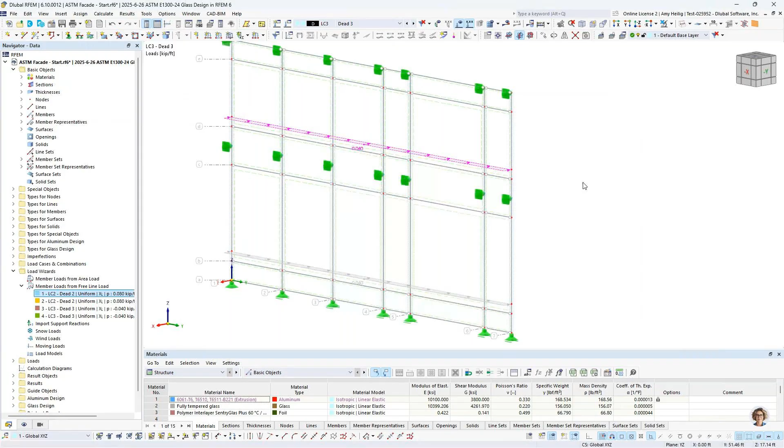For our wind pressure, we didn't previously have these surfaces modeled for our glass, so we need to quickly apply a new surface load here. The load direction is going to be in the global X direction. The wind pressure is negative 0.015 under load case number 4, and we can select all of our surfaces, numbers 2 through 31. I click apply and next.

We see that load applied here in the background. I'm going to change the load case to load case number 5 and simply adjust the magnitude to 0.007 for my wind suction, again selecting all of my surfaces. I click OK, and now we see that additional load applied here. If we drop down to our load combinations, we can see all of these loads applied together on the structure.

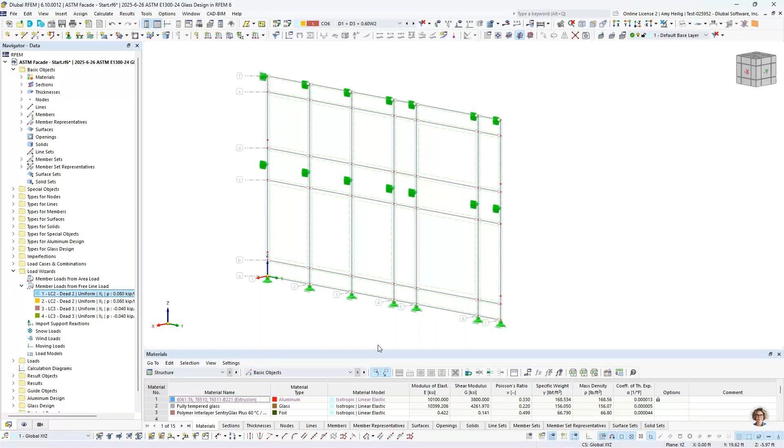So the final thing to do before running our calculation is to jump down once again to the glass design add-on. Remember, we have these same design situations that we had in example number 1 with our ASD load combinations. We'll carry out the strength, our IBC, we carry out the serviceability, and we're going to design all surfaces in the model. But we also have the aluminum design add-on as well.

You'll notice it's identical input here, that for our unfactored ASD load combinations, we will carry out the strength limit state design for ASD. Alternatively, if we were carrying out LRFD, we would probably want to enable this LRFD design situation for that limit state type. I'll go ahead and use the IBC load combinations to carry out serviceability or deflection checks as well for my aluminum members.

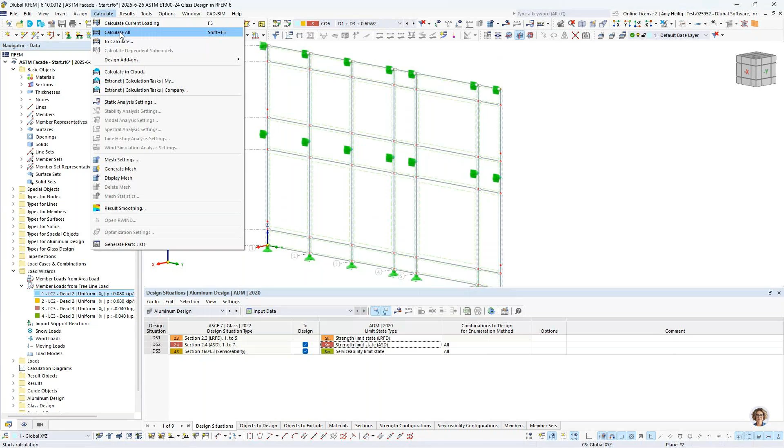So when we're done with that, we can go to calculate all. Now the program will go ahead and generate our mesh for us, and we would want to ensure, just like with example number one, that mesh was small enough. The program will then run through each one of the load cases and the load combinations that we have defined here.

Once we have the internal forces for our members from the various load combinations, we bring them into the aluminum design add-on. This is where we take a step further from the static analysis to now the design according to the ADM, applying all of our design equations from the various chapters for both the members, and you can see here it's now working on the member sets.

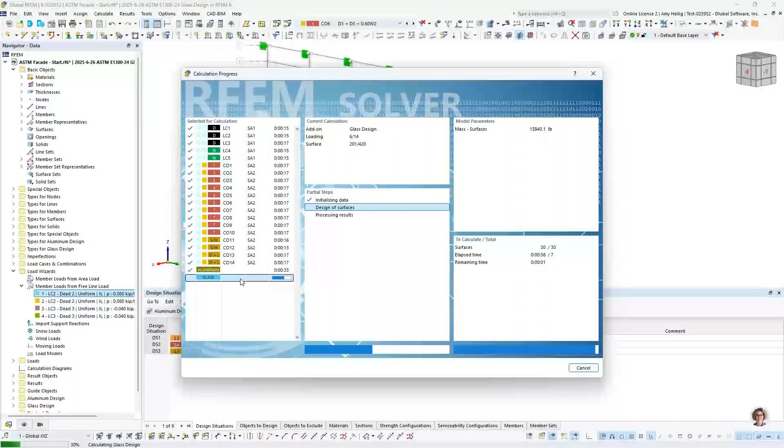Once this information is done for the aluminum design add-on, we take the results again from all of the load combinations and bring them into the glass design add-on to also carry out that design. Once this calculation is done, we are presented with our results, and I will go ahead and drop down to the glass design add-on.

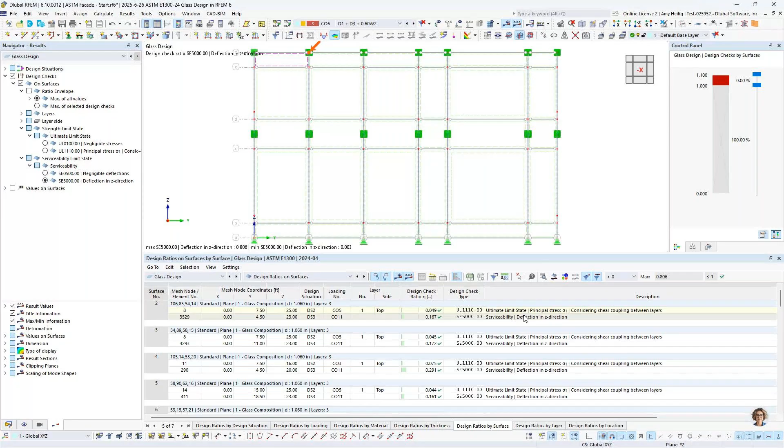We can view the design ratios by surface, and filter here to any check that's greater than 0. Very similar to example number one, we can view all of the information for the strength, principal stress design in table format, as well as our deflection checks. As we click on the table, we can see it syncs up in the background to show us exactly which surface we're looking at, or I could graphically select my surface and we'll jump to the relevant design checks within the table.

Turning back to the aluminum design add-on, same concept here, where we can view the design ratios according to the ADM, either by member, or maybe I want to take a look at the design ratios by member set — remember, those are the continuous members in the vertical direction. For either the members or the member sets, we are carrying out every single design check within the ADM, so we see all chapters listed here and all relevant design check ratios. We can always filter here to the max controlling design ratio for each member as well.

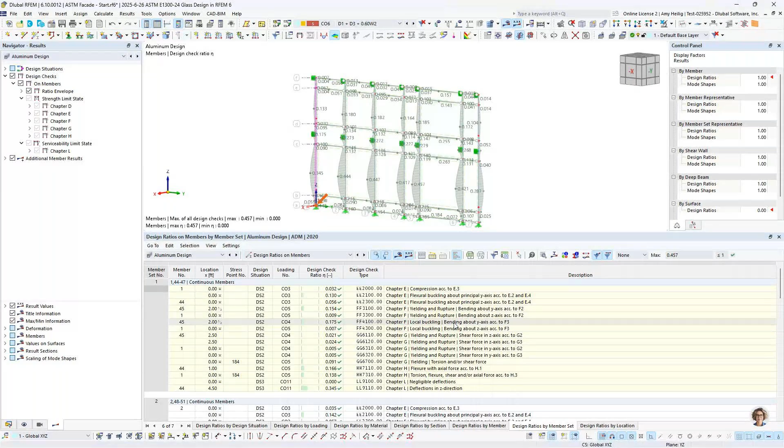But the powerful thing I mentioned about integrating that RSECTION profile into RFEM is those local buckling checks. You can see here local buckling according to chapter F. We can open up the design check details.

I could go ahead and zoom in here on my formulas to again see the code references, all of the variables and input information line by line, and ultimately how we have determined this design check ratio for this member related to local buckling.

We also can view the section classification, so here are all of those individual parts determined or set forth within our section. We refer to chapter B.5 within the ADM to see how these are classified.

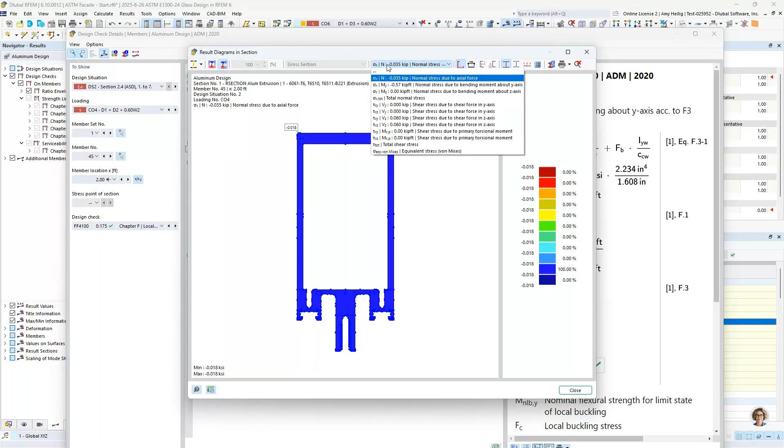We also can turn on here the diagram of the section, and maybe drop down to the stresses, where we can view any of the stresses on the element, including something like von Mises or shear stresses, to see the relevant stress under this particular loading.

Serviceability checks are also available for either the members or the member set. So all in all, it's very powerful that we can do the full design of the glass panels in addition to the supporting member design, whether it's aluminum, cold-formed steel, hot rolled steel, or whatever it may be.

Remember, we can always jump back to the static analysis results too, to view this additional information for each one of the load combinations, including member internal forces or surface stresses as well. Again, these are available under the various load combinations.

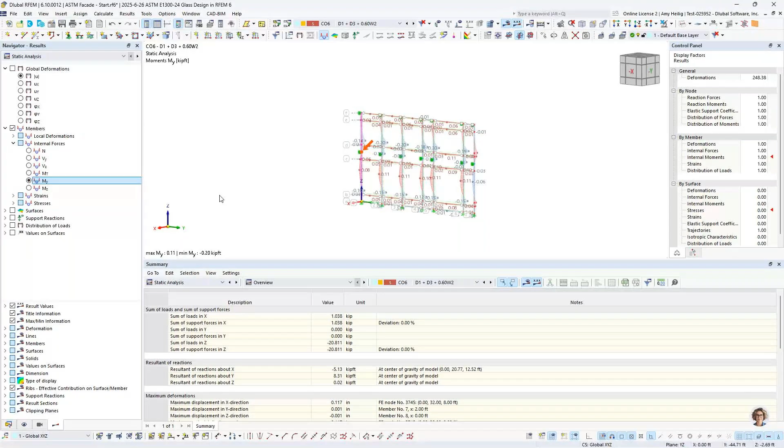Okay, so we will go back to our PowerPoint here to wrap up today's presentation. Just a few words on what we're currently working on for the glass design add-on.

As mentioned, we are currently in development with insulated glass design. This is something that we had in our older version, RFEM 5, but because we rewrote everything in RFEM 6 with better technology, better graphics, better workflows, this is taking just a little bit of time to get into the program.

But once this is released, the powerful thing is that we will generate underneath the hood for something like insulated glass, a 3D FEA solid model, done all automatically within the program. The reason why we have to do that is because we have to consider that nonlinear gas layer.

What's also nice is that when we do release this solid model generation, for either laminated or insulated glass, we can consider the true coupling behavior between the layers for shear. We saw in the examples today you can either set this to fully released or fully rigid, but with the 3D model, we can take into account the true stiffness behavior of those layers.

We'll be able to soon apply climatic loads, again important for those gas layers. And we're also working on additional international standards and implementing those within this add-on.